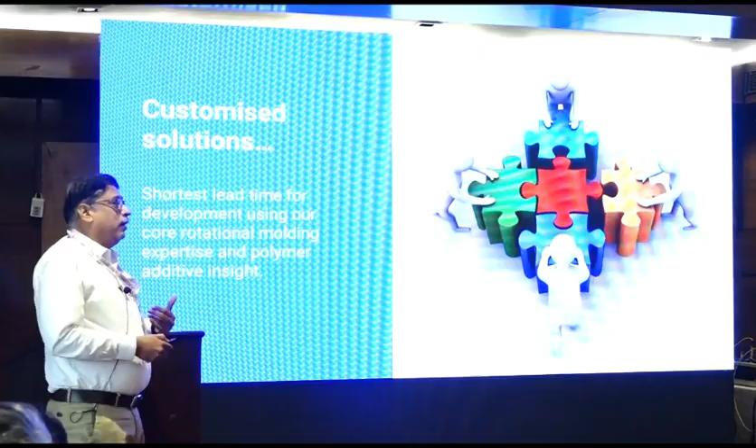As we started in this field and remain focused, we can always offer customized solutions. We are a reliable partner, already serving more than 300 customers in India and 25 countries abroad. These are our client base, and these are some of the compounds we are offering.

We are not just offering the polymer compounds and powders. We are also partnered with companies like Roto, offering some PP compounds specially for rotational molding.

Lysis technology is a special ink for polymer applications. It can be used for rotational molding, it can be used for blow molding, and you can just paint it onto the product.

This is recently introduced. It's basically extrusion welding. It's similar to extrusion welding, but a different type. It's like that, which is why we call it inject welding.

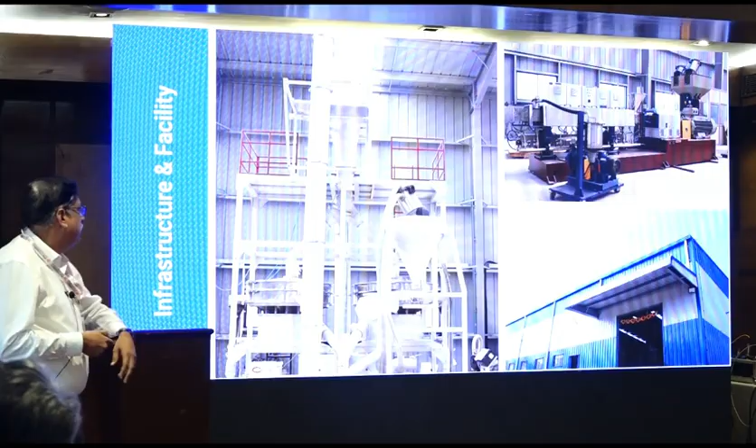So this is just our powder facility. We have twin screw, single screw, and all sizes of pulverizers. This is our packing.

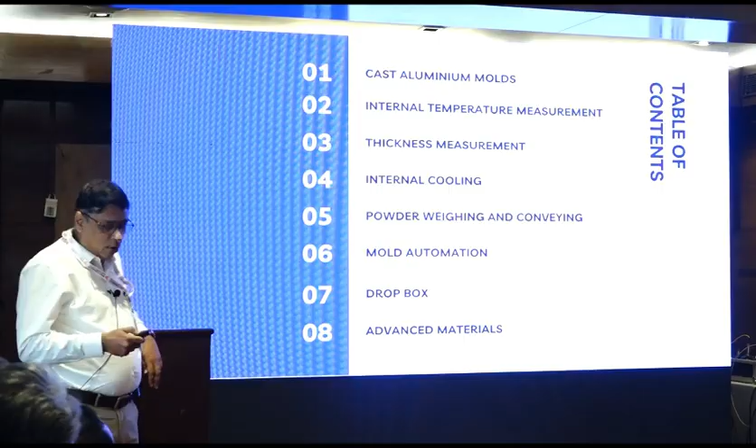Coming back to the topic, I have listed only a few of these. I can cover maybe 10-15 minutes, which is why this is only a few. But this is going to grow; this list will go on.

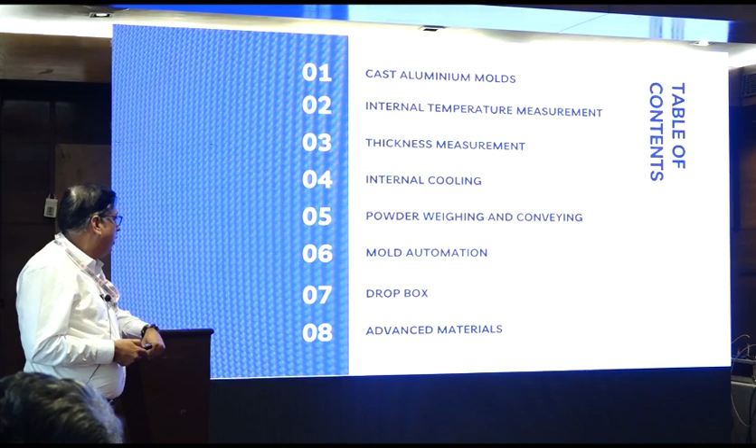Cast aluminum mold, internal measurement systems, thickness measurement, internal cooling, weighing, mold automation, drop box, and advanced materials. That's why I said initially this is more relevant to rotational molding than to other industries.

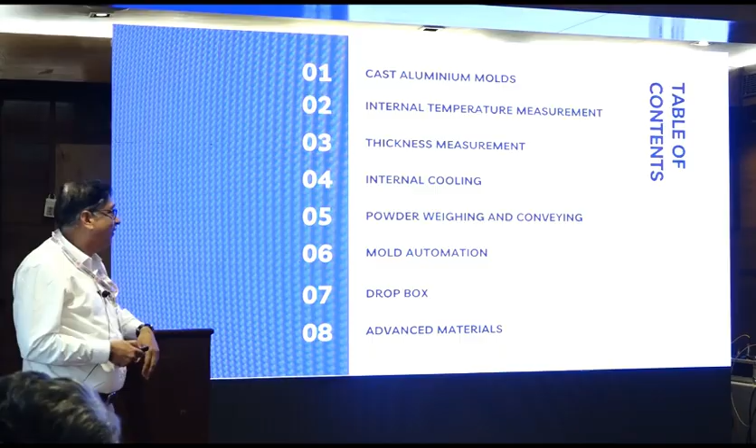With the advancement and critical, aesthetic products, the requirement for cast aluminum molds in rotational molding is increasing, and unfortunately nobody in India offers cast aluminum molds locally. So all molds presently are imported.

90-95% only from China. Very rarely, maybe I have seen one or two molds from Europe. So this is the biggest area - people are still struggling to make good castings.

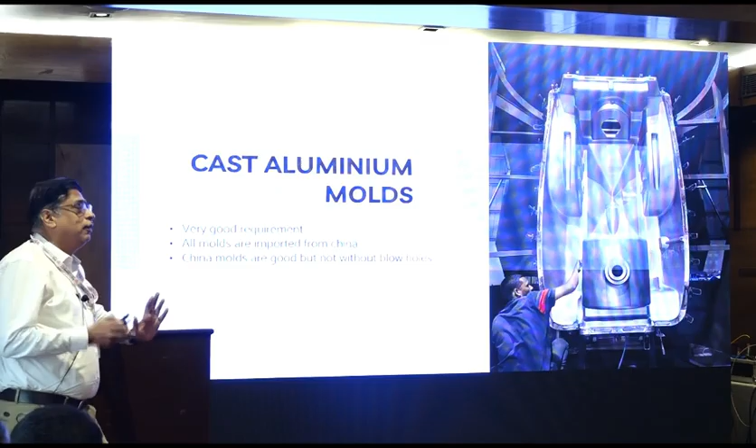Other things - all the know-how for rotational molding - everything is available. The problem is only with the casting: bubble-free casting with big castings. So this is the biggest opportunity.

As we move more into the automobile industry, or critical products, as Prashantji earlier mentioned, for injection molding or blow molding it's a closed situation. You are well controlling the temperatures, controlling the pressures, you can measure by touching the melt and all these things.

But in rotational molding, everything is happening in an oven and everything is moving, so it's very challenging to put something inside to measure it. That's why this innovative solution was developed maybe 20 years before. This is a mold - you cannot go inside, you cannot touch the mold or touch the polymer inside, but you can get the temperature readings of the hot air that is coming out from the mold.

So studies have already shown that if you measure the internal air temperature coming out from the vent or somewhere, you can still get an idea of what is happening inside with the polymer. That's why you can see the graph here.

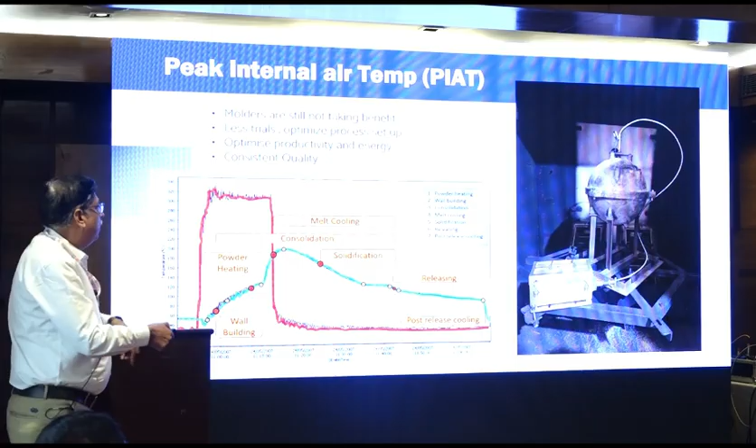This is the thermocouple - it goes inside, and this is a small system where the temperature is recorded, and by a wireless system the signals go outside and you can see the data outside. So in the rotational molding process, using all these systems on the laptop,

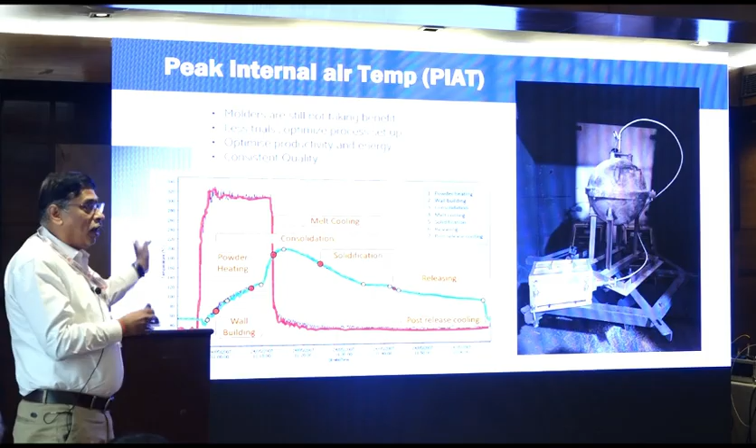you can see the whole process: powder sticking to the mold, this is sintering, this is cooling, this is releasing. You can see all these things on the laptop while sitting outside, so you know when to stop the heating, when to stop the cooling, and you can control the whole process. So this is presently the best system to control the rotational molding process.

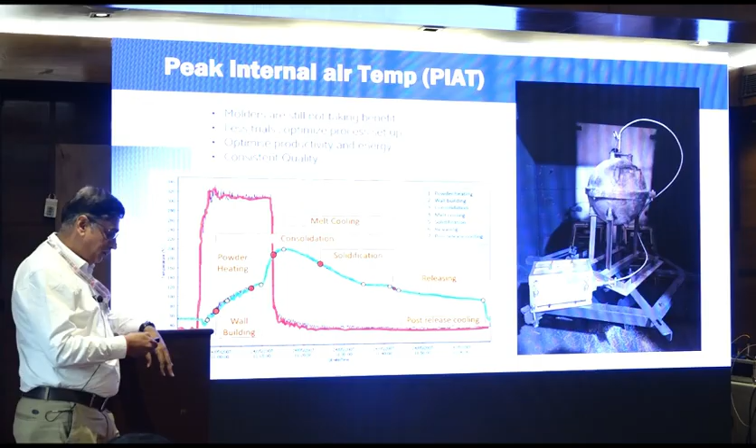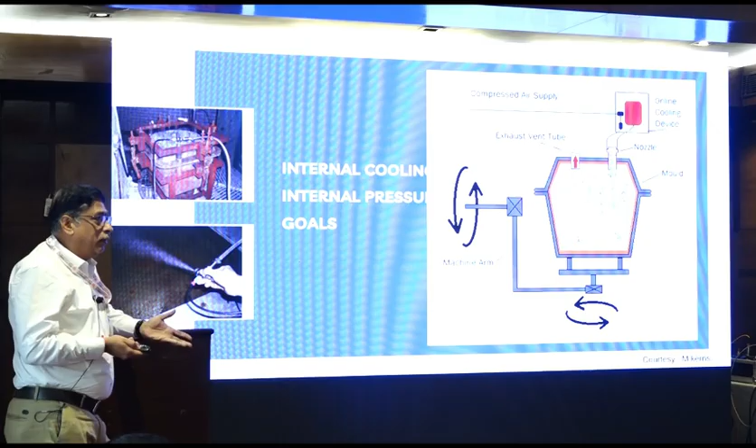Again, if you look at the rotational molding process, you are controlling the oven temperature, but not other things. At the same time, when your cooling starts, you are cooling only from the outside - there is no process for cooling from the inside.

This is an advanced requirement - when processing thicker parts, it's more important that they should be cooled from both sides. Otherwise there will be differences in crystallinity and issues with warpage and lots of things. So you can have some system to get inside, again maybe from the vent, or by putting some holes.

You can introduce some moisture or different cool air inside, and control the process. This is again very important, even if you're processing foam products, where it's critical to cool from both sides.

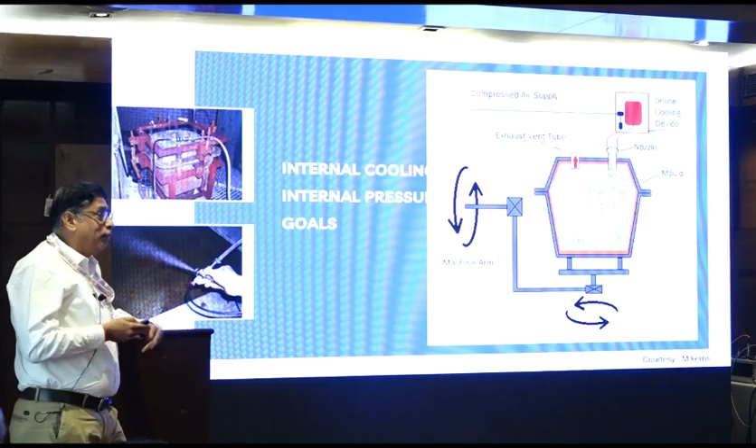So these are systems presently not readily available in India. Outside, yes, a lot of work has been done, but if somebody is interested, it's a ready market, and they can have a good opportunity.

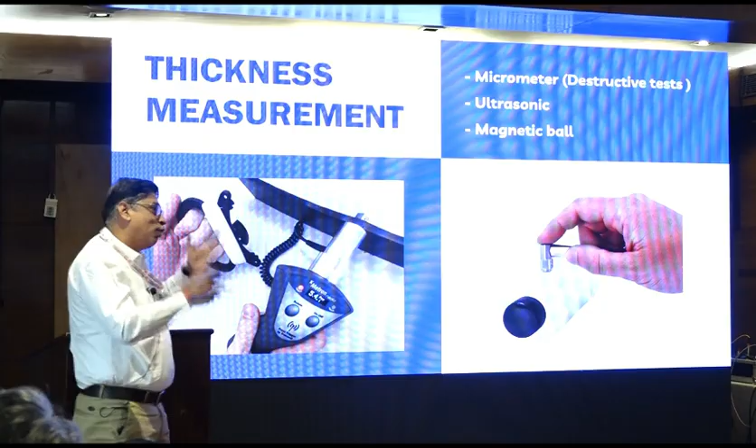So what is the advantage here? Without cutting the sample, you can check the thickness. Normally, all these BIS standards make it compulsory for a 10,000 liter tank to be cut. For what? Only to measure the thickness.

Because ultrasonic is there, but ultrasonic has a limitation, because some pinholes are there or even some foam tank, it will not work. And again there is a skilled operator required for ultrasonic measurements, because slight pressure changes from the outside by the operator will give different results. And you never know when it is going right and wrong. That is the main problem.

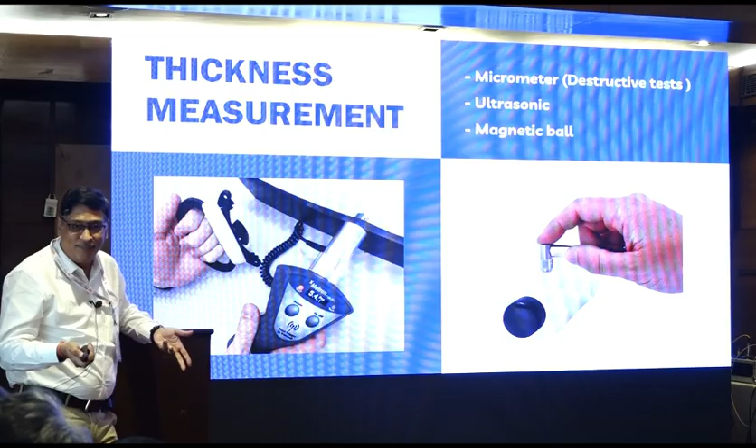And again you require a couplant, maybe some grease or something. So if your surface is textured, again it's a problem, not possible. So you are talking about fuel tanks, you are talking about 15,000, 20,000 liter tanks, and you don't have the system to measure the thickness. How are you going to ensure to the customer that this is the right product, right quality, and it is going to last maybe 20 years?

So this is the solution available, and this is available now locally.

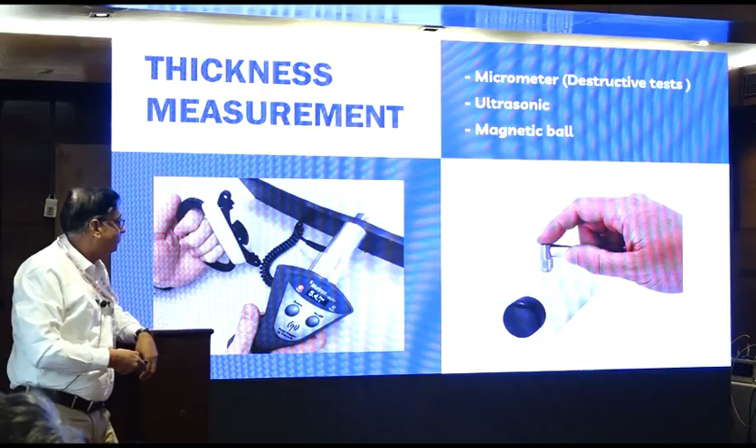Advanced materials. Initially we were talking about only polyethylene. Even right now it's 95% or 96% only polyethylenes. Even with the polyethylenes, we are restricted to maybe just 1 or 2 grades manufactured by local suppliers. So that is not going to be sufficient for custom rotational molding. For water tanks it's okay.

And now going ahead, lots of people initially use the same polymer grade with the same MFI, with the same density for all products, maybe it's a fuel tank, maybe it's toys, or maybe something. So there are lots of new requirements. That's why the compound comes into the picture.

You can modify the polymers to give different properties. As we are already offering some HDPE compound, we are offering some flexi tough, super tough - that's what we are modifying. There are lots of opportunities.

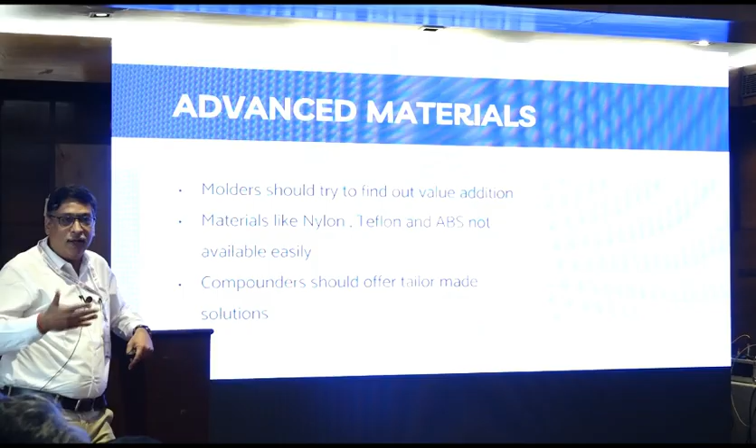Even with the polymer, engineering polymer, I have not heard for maybe 4 or 5 years about some customer asking about Teflon, asking about nylon. I've processed for maybe 15 years. Before that I have processed PVDF, but nobody was ready, nobody was asking.

And now what is happening? Every day today, people from hydrogen liner, people from some roto lining, they are talking about Teflon, they are talking about nylon. One of the applications we are developing is some small flange type part.

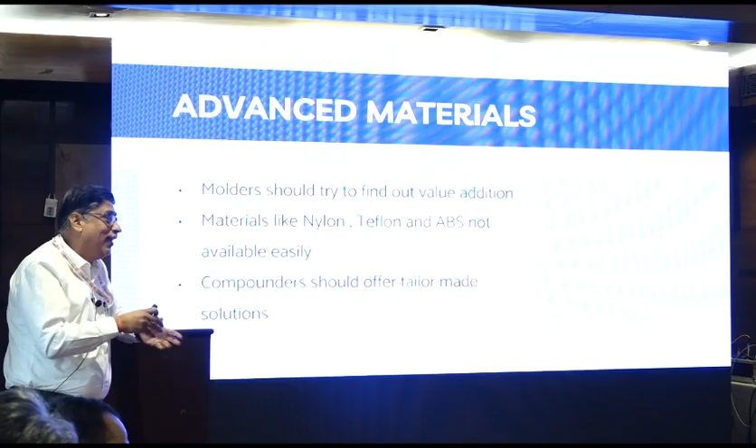That is going to be used in a satellite. So they want to put it into the satellite, and they are asking what extreme material you can give. So we say, okay, we can give Teflon and all these things. So we are working on that.

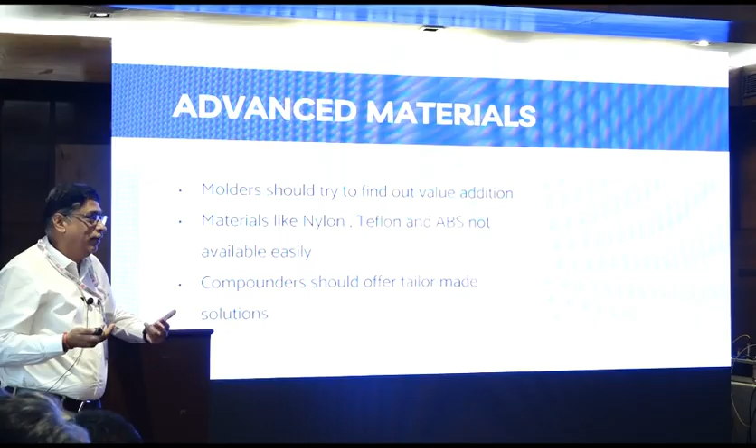But things are changing. Young companies, young startups are coming - yesterday only this news from some Hyderabad company, they made the first rocket in India, the Skyroot company. So all these people are now offering new material, asking for new things. That's why other industries who are already in engineering polymers can certainly see what they can offer, or what they can modify and offer.

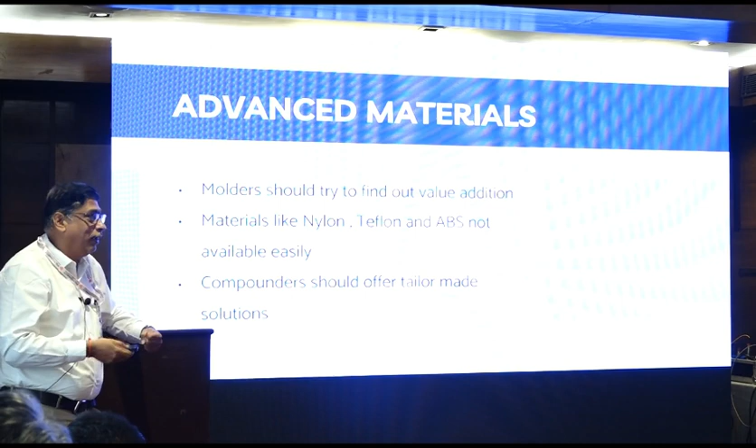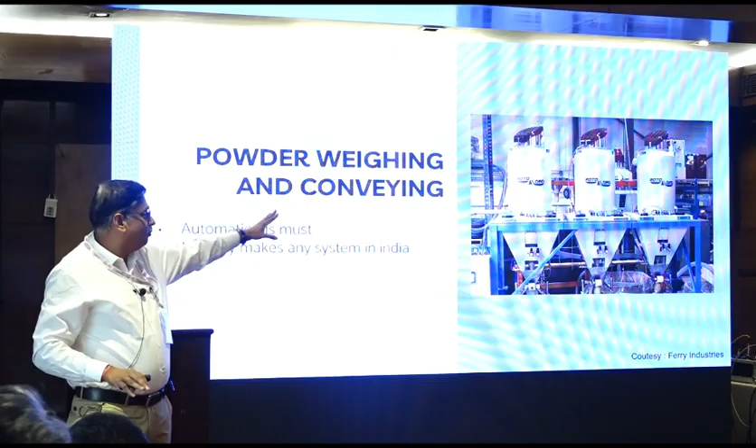Again, this simple application, powder conveying, powder weighing, everything is available for maybe PVC, maybe for extrusion, injection molding. The same similar system has to be modified or made suitable for rotational molding, to put the first time material, or maybe put multi-layer materials inside. But it has to be customized for rotational molding.

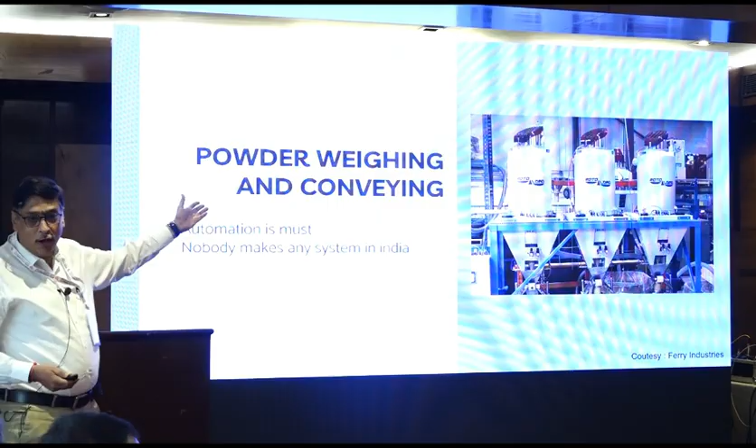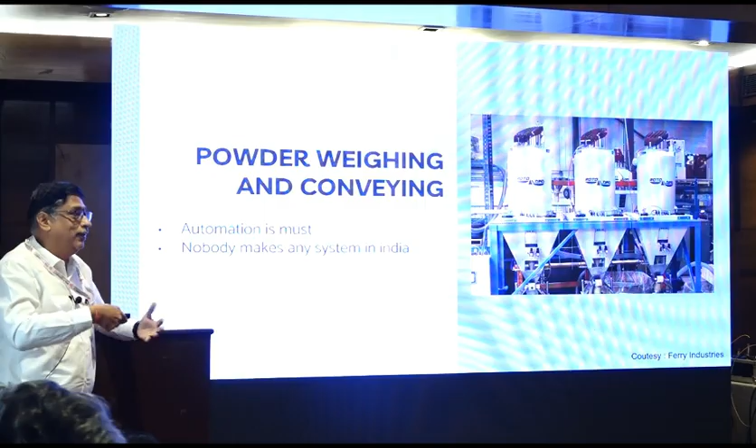And right now even my customers are asking where to go for this system. This is something available maybe in US or somewhere, but it's too high priced, and it requires customization - that is the most important thing. This can only be done by a company who is going to work with local roto molders on a daily basis in development. Then this is going to happen. So equipment is available, but putting it in as a solution to the rotational molder is much more important.

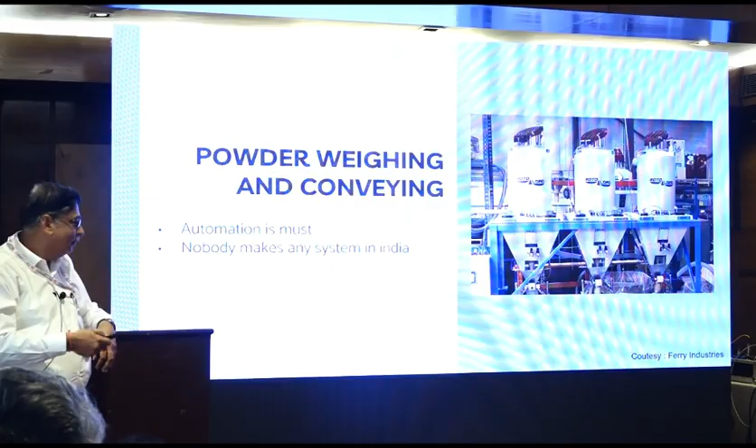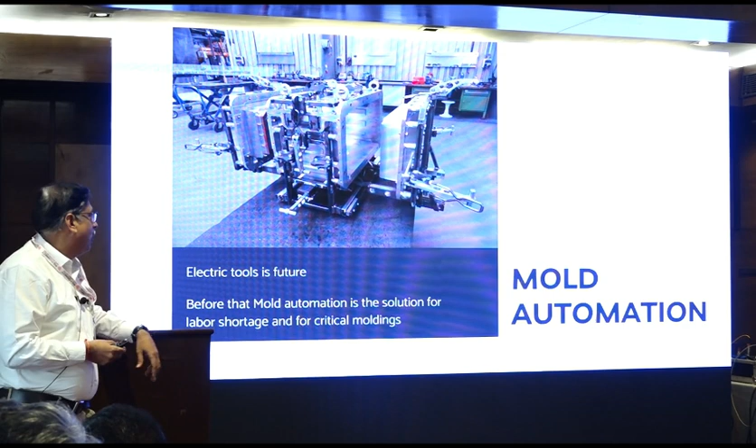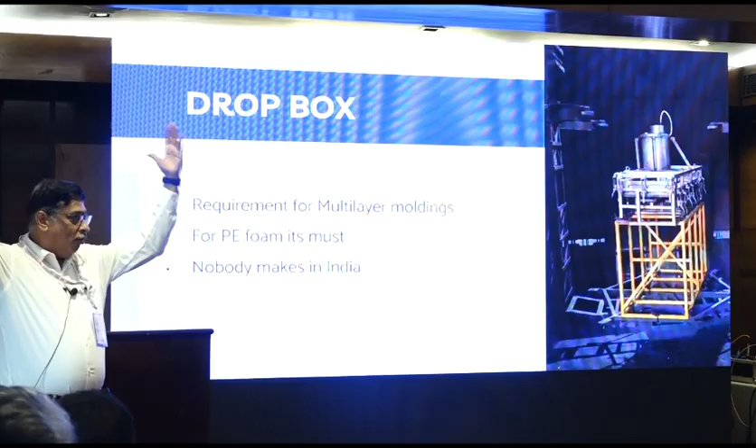Drop box. When we are talking about multi-layer, when you are putting the foam, you require a system to put the second layer inside while it is moving. Every time you cannot take it outside and put something - because for a tank it's very easy, you have a big manhole, you can stop the machine and put something inside. But imagine other products, just look here also.

This is some plate type - this photo is from my factory only. This is some product from the US, it's like a plate. They want to put PE foam as a second layer. How will it go inside? By opening and manually? No chance.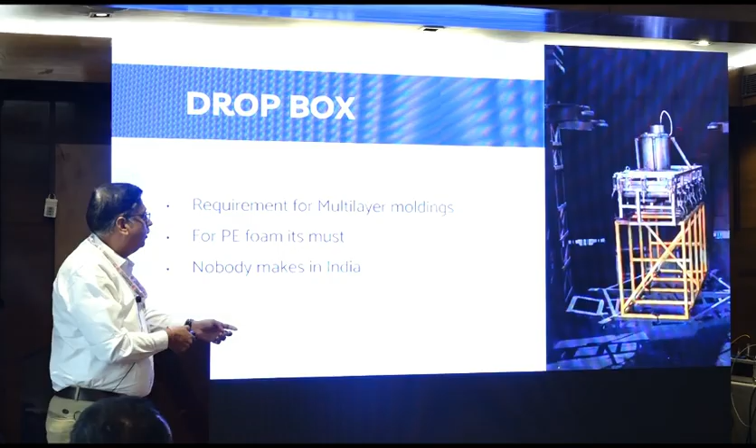So this is a simple drop box. This is an insulated box, operated from outside by opening some air pressure. The valve will open, the second layer material is already inside, and because it's insulated, it will not melt.

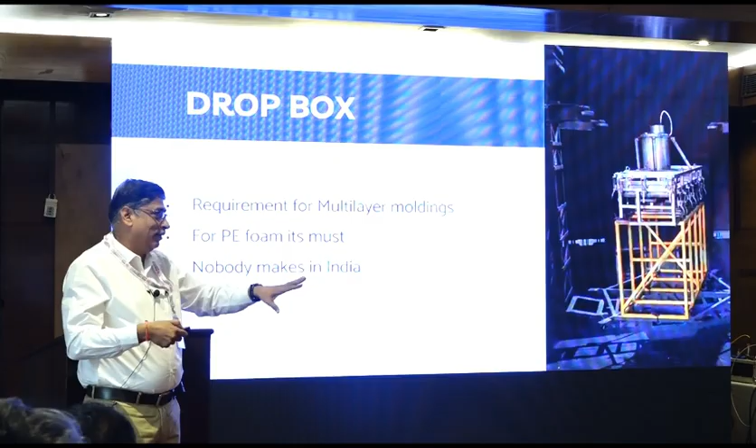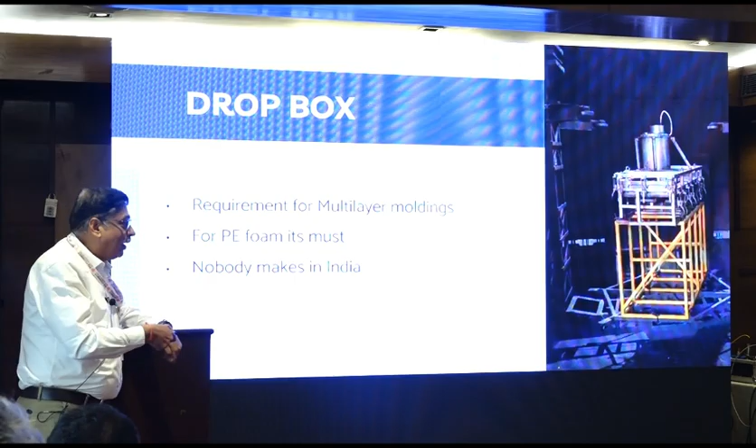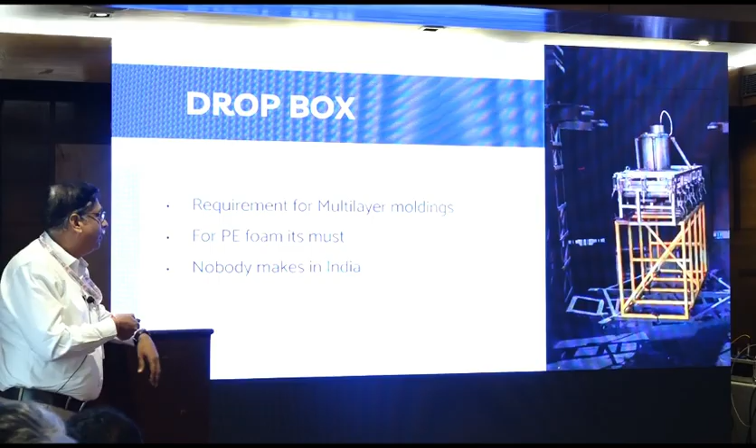This is available everywhere, but not in India - nobody is making it. Even we are pushing our mold makers to give us something. This is nothing of big engineering, but somebody needs to sit and discuss, get trials with the molder and associates. We are already using it, but I still say this is half cooked - we are still in the development process, so maybe within months it will be perfected.

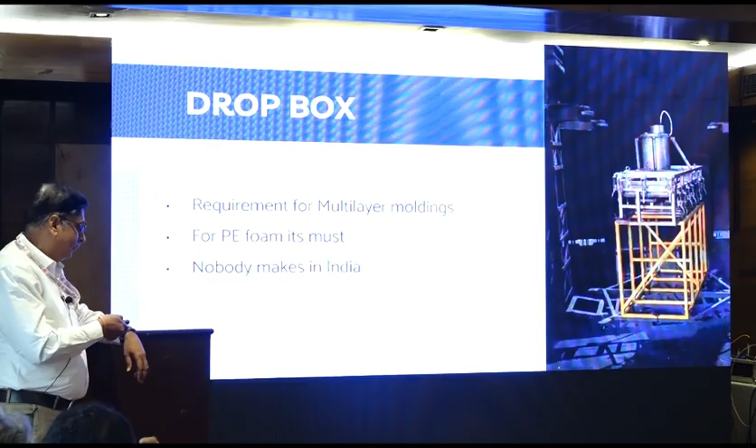So this is my short presentation, but my point is very clear: lots of new things are coming, but for molders, if you are not ready with the technologies, you cannot serve this industry. And for other polymer people, roto molding is going to have a big opportunity for value-added products. Commodity is already there, but for value-added products, who is interested? Yes, roto molding is going to give the biggest opportunity. Thank you.